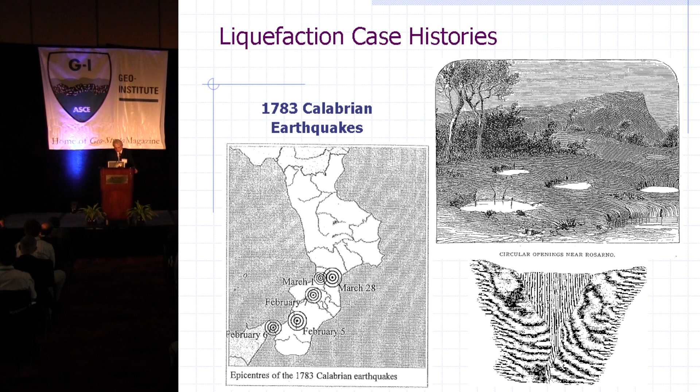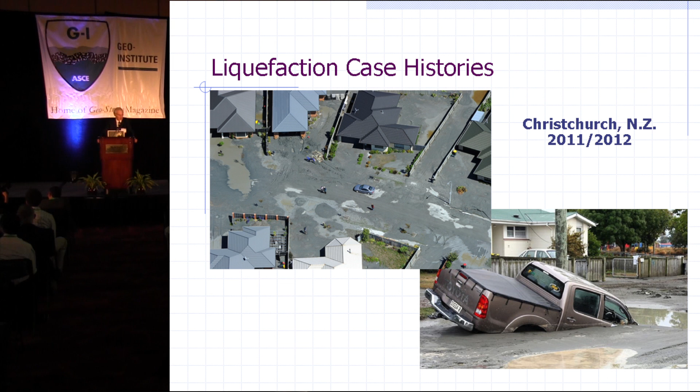Fast forward to 2011, 2012, the people of Christchurch in New Zealand also had 3 major earthquakes in sequence, ranging from magnitude about 6 to 6.3. Each time these earthquakes occurred, there was massive liquefaction in residential areas. You can see the sand boils in the streets, sand enveloping housing sites, and loss of bearing capacity for a pickup truck. Quite major devastation - in fact, 60,000 houses were damaged to one extent or another by this liquefaction phenomena in the Christchurch earthquakes.

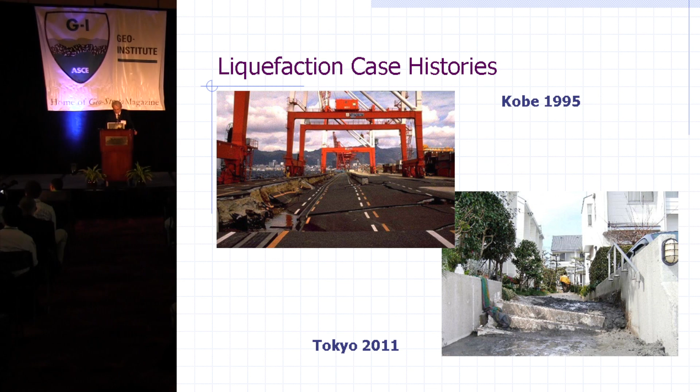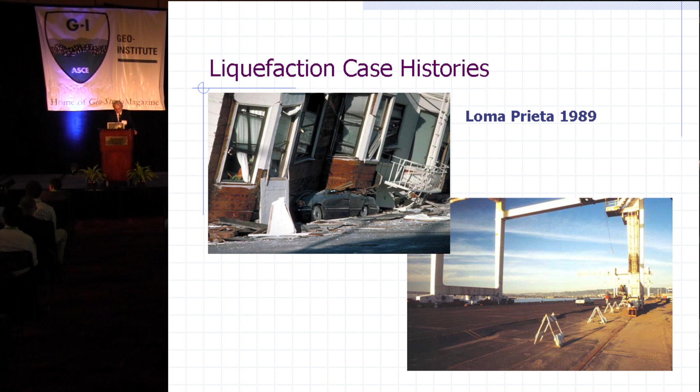Every earthquake has its problems. In Kobe in 1995, major lateral spread problems at the port. Tokyo 2011, known for the tsunami, had major liquefaction damage in Tokyo of a variety of forms. Here in Loma Prieta in 1989, bearing capacity problems. Again, more problems at the Port of Oakland arising from lateral spread.

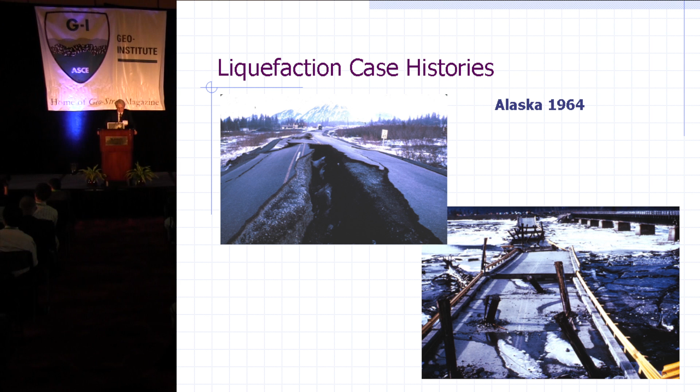Alaska 1964, one of the events that triggered interest in liquefaction here, caused major damage to highways from lateral spread problems and major damage to a variety of bridge structures. And Niigata 1964, just prior to the Alaskan earthquake, had major liquefaction problems, providing the classic photos now of bearing capacity problems with apartment houses and collapse of bridges.

So the problems of liquefaction are well known, and I've chosen to talk a little bit about some of my observations over the years on liquefaction problems, particularly the relationship between pore pressure buildup during the earthquake and volume change characteristics of sands under drained conditions.

So there are many damage modes, as you've seen from the slides: surface manifestation problems, slope instability problems, lateral spread, bearing capacity problems, liquefaction settlement after the earthquake. All of these problems have to be addressed by geotechnical engineers if they predict liquefaction might be triggered.

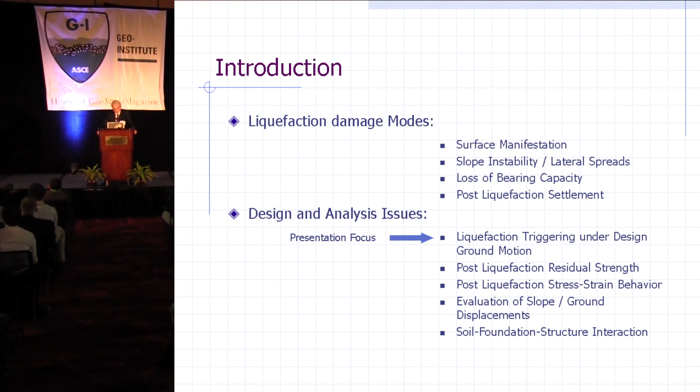So the issues in addressing these problems are numerous. One is the buildup of pore water pressure in the first instance leading to liquefaction. There's the post-liquefaction residual strength problem, which governs stability. Post-liquefaction stress-strain behavior is difficult to model following liquefaction. Slope and ground displacements are a challenge. Soil-structure interaction problems are a challenge. All of these problems are still getting extensive research, and improvements in our ability to analyze these issues are continuing.

So it's now almost 50 years since the Alaskan earthquake, and we're still working on these problems. But today I'd like to focus on the problem of pore pressure buildup.

So the scope of the presentation will focus on the mechanics of pore pressure buildup leading to liquefaction. I'm going to talk very briefly about the historical development of how we handle that, going back into the 1970s. So if you'll forgive me, I'm going to reminisce quite a lot about the 1970s, which was a very active period of research.

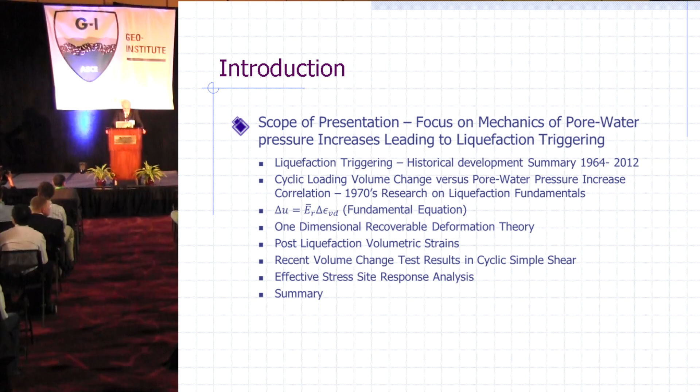That research was at UC Berkeley under Harry Seed's direction. We're going to talk about this fundamental equation, delta U equals E bar R delta epsilon VD, which we'll discuss. Then I'll comment on how the recoverable deformation theory, which plays an important role in pore pressure development, can be analyzed using simple particulate mechanics. A few comments on post-liquefaction volumetric strain, some recent test results on cyclic simple shear tests on dry sands, and finally a few comments on effective stress site response analysis.

Well, first of all, comments on historical development. The problem we have during an earthquake is one of cyclic shear stresses. If I can get the pointer... I've lost the pointer. There we go. Where the wave propagation causing site response generates a condition of cyclic simple shear near the ground surface.

And this is reproduced in a laboratory context as an equivalent number of cycles of loading. In 1964, when Harry Seed was faced with this problem, he was fortunate that he had a research program where he was looking at the resilient modulus of subgrade soils, and had developed a system of triaxial testing for repeated loads. So he could adapt the system with a research student named Ken Lee and start doing cyclic triaxial tests where we had cyclic deviator stresses being applied to the sample.

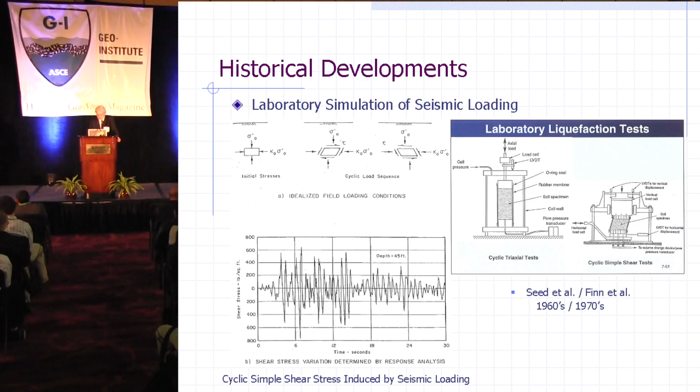These are typical lab test results that they got from such tests, where you see in terms of the cyclic triaxial test, the pore pressures gradually increased. I'm afraid the pointer is giving me all sorts of trouble. Here we go, okay. As you can see, during the loading sequence, the excess pore pressure builds up progressively to liquefaction. The cyclic component of the pore pressure is due to the cyclic all-round pressures generated by the deviator stress. What you will notice is that the cyclic strains generated during the simulations are very, very small.

In fact, by and large, they're of the order of 0.1, 0.2, 0.3%, which in a context you can understand is if you have a 1-inch high sample subjected to simple shear, the displacements are of the order of plus or minus a thousandth of an inch. So the liquefaction pore pressure buildup phenomenon is one of very small strains. In the case of the cyclic simple shear equipment, the results are similar. You see the pore water pressure building up very slowly, and again, the strains are very small.

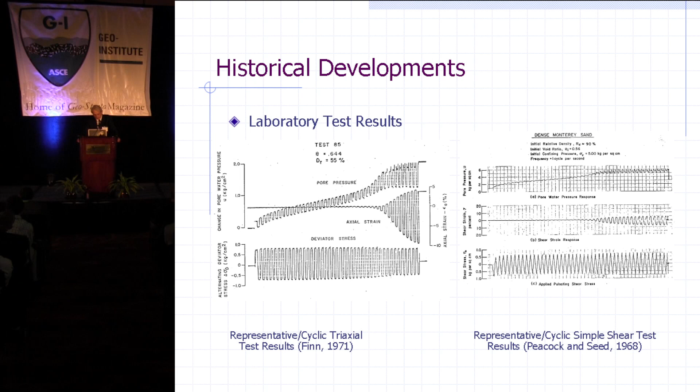What was found in these tests is that the cyclic simple shear process generated much faster rates of pore pressure development, such that the liquefaction strengths developing from the triaxial test needed factors of the order of 2/3 to be applied to get correct numbers. So the cyclic triaxial test method was gradually, I think, replaced by simple shear type loading equipment.

When they started continuing these tests through the early 70s, it was found that there were a number of issues in relation to using the test data for design. The test data, in terms of the strengths, was plotted as the cyclic stress amplitude applied to the sample divided by the normal effective stress, versus the number of cycles of loading, getting a so-called liquefaction strength curve. What was found is that the curves were a function of over-consolidation ratio.

If the samples, which should be normally consolidated, were over-consolidated, the strengths increased dramatically. The strengths also increased with relative density. Also, the test data was very sensitive to sample preparation methods, in other words, the fabric of the material. Trying to get field samples, undisturbed field samples, was very difficult with these types of materials, as I'm sure you're all aware. At the time, nuclear power plant siting was becoming a major issue.

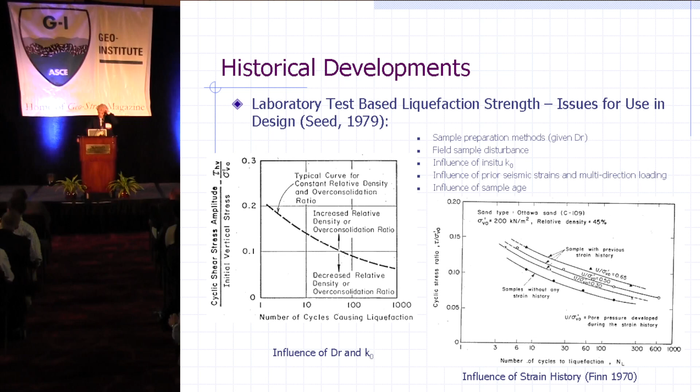For example, at the Arizona nuclear power plant siting problem, they had liquefaction problems, and people were trying to carve samples, block samples, to get best undisturbance. The Japanese were using freezing techniques to try and get very good samples. A number of issues about trying to get good material.

Influence of sample age was of concern. And also two-directional shaking. The shaking in the lab was just one directional. In the field, it's all over the place in three directions. So all these issues made it very difficult to try and establish the conditions for liquefaction in a design problem.

And so by the early 1970s, a different approach was being considered by Professor Seed and his colleagues. And that was to go into the field and look at field case histories where, based on the peak accelerations from the earthquake, which induced liquefaction or didn't induce liquefaction, they could calculate what the stress ratio demands were and then plot that against the standard penetration blow count.

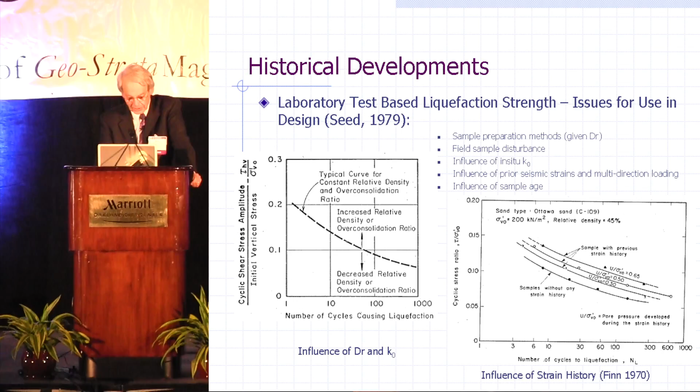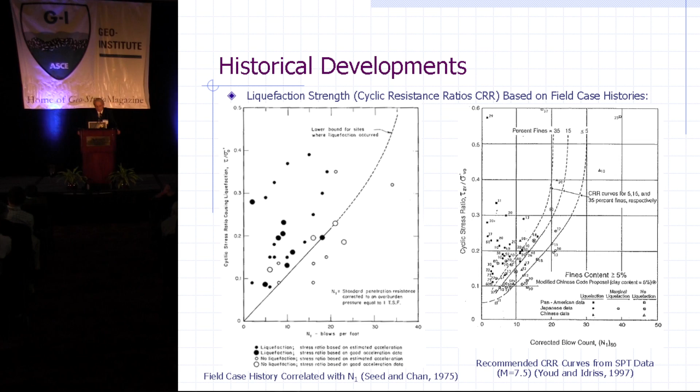The types of plots that are used today in these analyses are shown here on the right. Those of us working in the field use these types of plots to establish the liquefaction strengths dependent on the corrected blow counts, the percentage fines. These are the plots we use for magnitude 7.5 earthquakes. For other magnitudes, adjustments are made.

Similar plots are available for design based on CPT, tip resistance, or shear wave velocity to establish liquefaction strengths in the field.

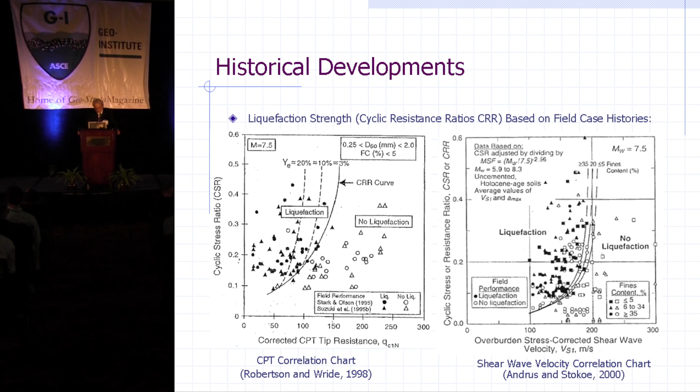So once those strengths have been established, then the procedure is something like this, and many of you have been through this procedure. You basically take the SPT data and plot it as a function of depth. You make adjustments for fines content. You then compare the liquefaction strengths with the cyclic shear stress demands from the earthquake.

If liquefaction is triggered, then one has to evaluate the consequences of that in terms of potential ground settlement, ground deformation, slope instability, etc. So that's the standard procedure, and there are still issues related to how that's being used, but nevertheless, that's where the process is at the present time.

So I want to now reminisce a little bit about the 1970s again, because we want to talk a little bit about the nature of the pore pressure buildup process and what are the parameters that are controlling the actual buildup of pore water pressure itself leading to liquefaction.

And at the time in the 70s and even today, the process is described as described by Seed and Idriss in 1971, which simply says if a saturated sand is subjected to ground vibrations, it tends to compact, decrease in volume. If drainage is unable to occur, the tendency to decrease in volume results in an increase in pore pressure. If the pore pressure builds up to the point at which it equals the effective overburden pressure, the effective stress becomes 0, the sand loses its strength completely and liquefaction occurs.

Of course, we now say the sand doesn't lose its strength completely, we talk about residual strength. But nevertheless, the thought is that there's a relationship between the way pore water pressure builds up and volume changes that occur under drained conditions.

As a professor at the University of Auckland, New Zealand, we had a great system. We were able to go away on a year's sabbatical leave every 5 years.

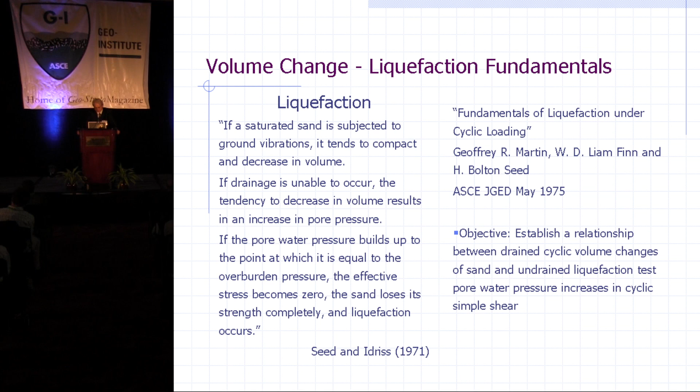So the question first is, how do we characterize volume changes in dry sands? At the time, in 1971, Professor Seed had a graduate student, Marshall Silver, doing work on cyclic simple shear tests on dry sands. The reason he was doing that was that in the San Fernando earthquake, there were major settlements of fills, which were basically compacted, slightly moist, sandy material.

So again, they went to work with the cyclic simple shear test. In this case, it was the NGI wire-bound membrane type of test, and it produced results like you see on the screen. You have cyclic shearing stresses being applied, and you're measuring the volumetric strains or change in height of the sample. The shearing strains being applied, simulating earthquake shearing strains, are very low, on the order of 0.3%.

So you could do tests on a variety of samples with different relative densities, and measure the accumulated volumetric strain after a given number of cycles, in this case 10, plotted against the cyclic shear strain amplitude. On the left, you see the resulting curve. The interesting thing about the results was that the volumetric strains were found to be proportional to the cyclic shear strain amplitude and totally independent of the confining pressure, as an experimental observation.

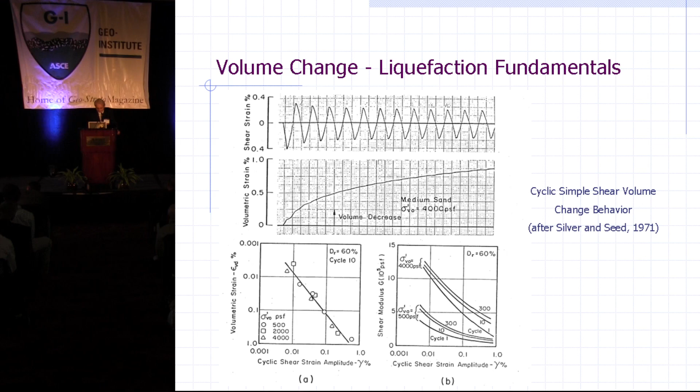So some additional tests were done to establish the database for subsequent research, where a particular sand called crystal silica sand, with a relative density of 45%, was used. You can see on the top curve that the volumetric strains are indeed proportional to the shear strain amplitude for a given number of cycles, which is a feature of the test results. The question is, can you develop a constitutive model which would allow you to establish volume changes under a random sequence of loading, as opposed to uniform cycles?

And the concept was to assume that the accumulated volume change during previous cycles was a memory function, and that for an increment of volume change under a future cycle of 0.1% shear strain, this particular curve would establish the incremental volume change.

So if you made that assumption, that the accumulated volume change was the memory function, then you could establish a series of curves which told you what the change in volumetric strain was for a given cyclic strain amplitude, as a function of the accumulated volumetric strain. A simple, two-parameter relationship could be established to give you the incremental volumetric strain under a given strain amplitude for these accumulated volume changes.

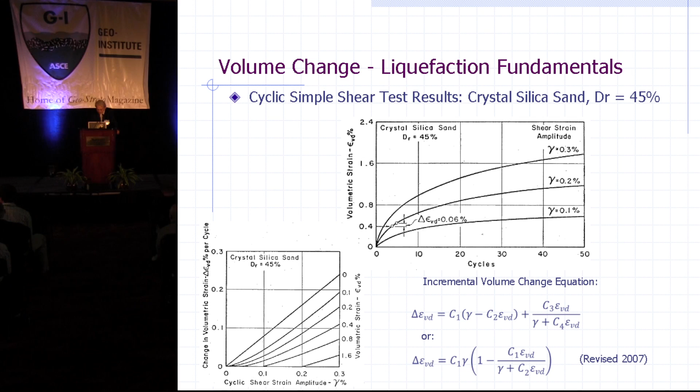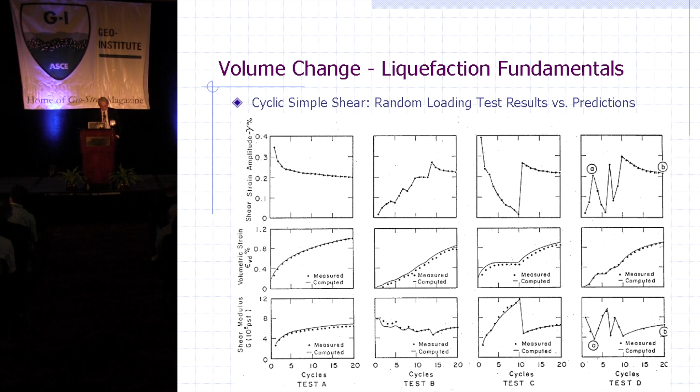That could be tested by doing a series of tests with random shear strain amplitudes, and you can see from these plots that quite a sequence of random shear strain amplitudes were applied to the samples, and the volumetric strains recorded. The dots are the measured values, and the lines are the computed values. So you can see the basic constitutive model now works extremely well, allowing you to compute volumetric strains under any sequence of strain loading.

Let's now look at the mechanics of one-dimensional loading of sands, because the recoverable strain in sands during pore pressure buildup plays a critical role in establishing the magnitude of that pore pressure buildup. So what happens when you actually load a sand in one dimension? On first loading, you have a nonlinear curve, and if you unload, you have an elastic rebound curve. So the loading of the sand generates a lot of irrecoverable strain, and you unload to have some recoverable strain.

It turns out that you can show that if you first load a sand in one-dimensional compression, the contact stresses on average at individual grains are actually at the cone of friction. So when you load a sand, you're actually getting sliding at grain contacts. It's like a limiting equilibrium condition.

You'll find that theoretically the horizontal stress versus the vertical stress is a constant. In other words, we're loading under constant K0 conditions, and K0 might be 0.4. If you unload down the unloading path, the particle contacts move within the cone of friction, and you start getting rotation of the contact stresses, and you actually start getting increases in K0 as you're unloading, until the contact stresses move right on the other side of the friction cone, and you get vertical slip.

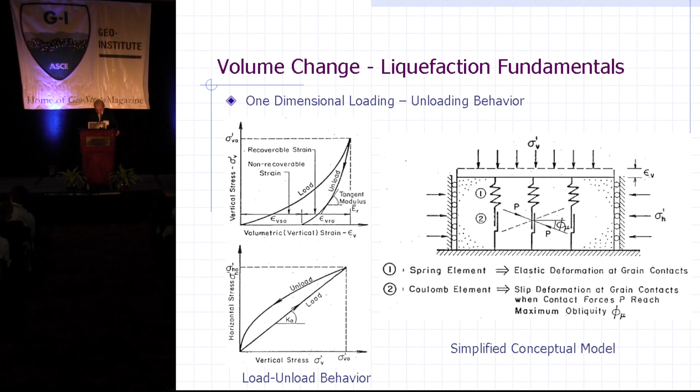Having established that concept, we're in a position to establish that relationship between volume reduction during drained tests and pore pressure increase in undrained tests. The concept is, even if you have a saturated undrained condition, you're still getting this slip at grain contacts similar to what you'd get in the drained test. So it still occurs. So if you look at the volume compatibility equation, you have to have the...

Change in volume of the voids, which is simply delta U times the void ratio, or the porosity divided by the compressibility of water, which is the change in volume of the voids under an increment delta U. And so that equals the change in volume of the structure, which is delta epsilon VD, the incremental change of volume, minus delta U over E bar R, which is the tangent modulus on the rebound curve.

And since Kw, the compressibility of water, is so high, essentially that equals 0 for a saturation ratio of 1. So therefore you have the very simple relationship that under an increment of shear strain, the pore pressure increment delta U must equal the rebound modulus E bar R times delta epsilon VD, the volume change that would occur in a drained sample under the same cyclic strain increment.

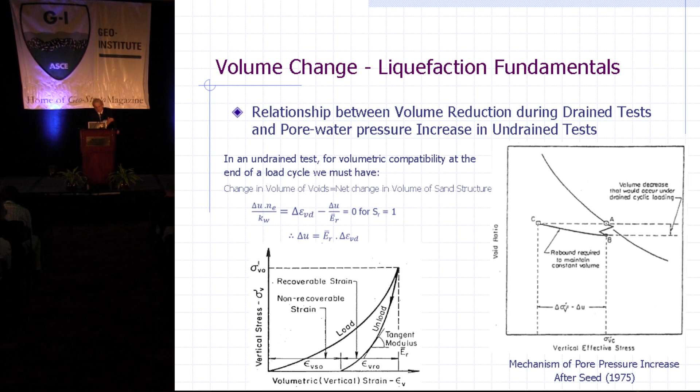So we coined that as a fundamental relationship governing pore pressure increases and their relation to volume change. We also mentioned that the shear stiffness increases with the volume changes, and we attributed that to the increase in K0 during the test. So we could establish a relationship between the cyclic shear stress versus cyclic shear strain, the nonlinear behavior, as a function of the volumetric strain. As the volumetric strain increased, the material in fact stiffened, and you could develop a relationship to describe that.

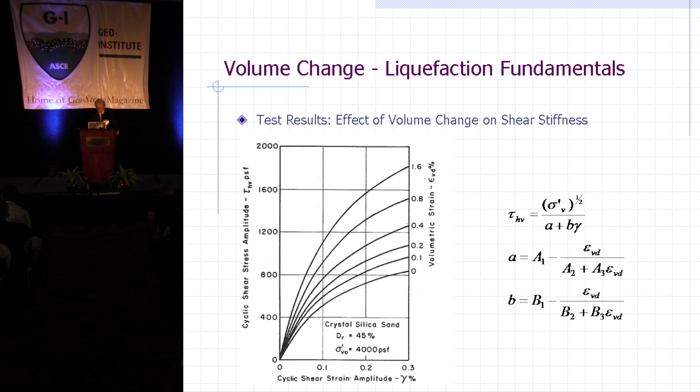So now you're in a position with these equations to look at the behavior of a simple shear test under stress-controlled conditions. You can simulate the rebound characteristics through a series of experimental curves — the ability to model a cyclic simple shear test under saturated undrained conditions and see what sort of results you get.

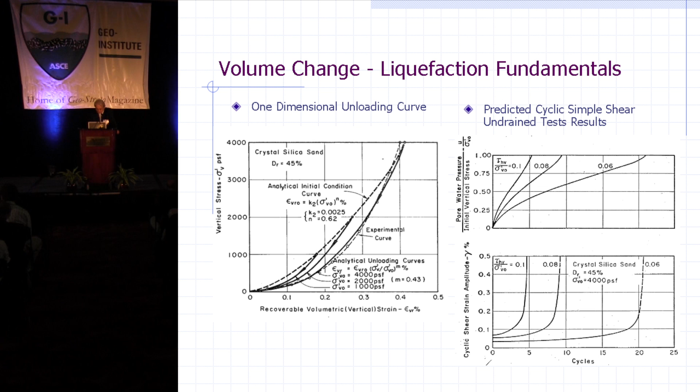The reason for that is something we hadn't addressed at the time: as the volume changes occur, the slip is going to occur during the undrained test, and you get the K0 value increasing. If K0 is increasing, that means you've got more recoverable strain accumulating as opposed to the recoverable strain for a test without the cyclic shearing. We'll talk about that shortly.

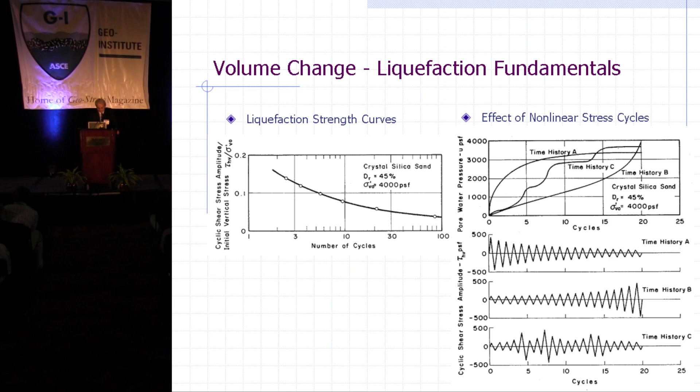So it was felt that this concept was reasonably robust based on the initial results, and this led us to think about system compliance and its effect on liquefaction tests.

The concern was that the system, which we assumed was at constant volume, could have a degree of compliance. For example, membrane penetration was becoming of concern to those in geotechnical engineering, where it was recognized that as you increase the pore pressure in a sample, the membrane, which is under confinement, would gradually expand. So it was nicely dimpled at the start of the test and nicely smooth at the end of the test. That was generating an artificial volume change in the sample.

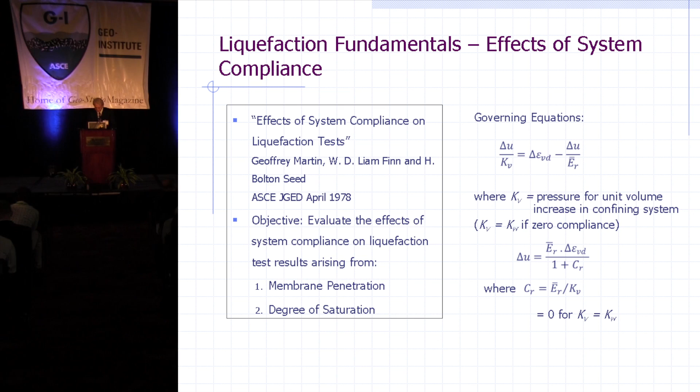So you could measure that artificial volume change in the sample, and you could end up with an expression based on a compliance ratio, where delta U equals E bar R delta epsilon V, 1 plus the compliance ratio, where the compliance ratio is the ratio of the modulus against the volume change characteristics of the system.

This had a big effect on the liquefaction strength curves. In fact, the liquefaction strengths almost doubled if the compliance ratio was about 1 — that is, the system compliance or volume change due to perhaps membrane expansion was about the same as the rebound modulus.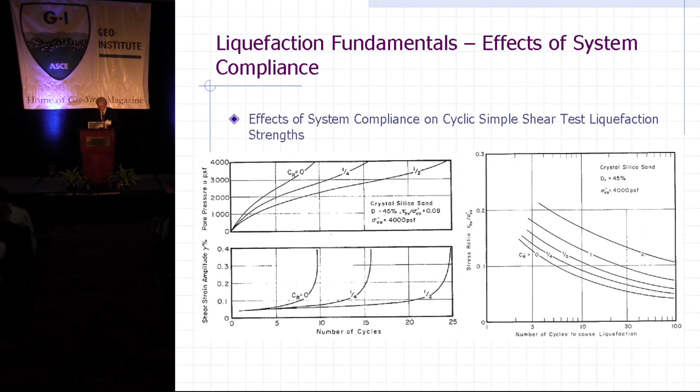This led us to look at some of the test results which had been published, particularly by Lee and Fitton in 1969. Ken had done a series of tests on 2.8-inch diameter samples with a variety of grain sizes, and he found that the liquefaction strength increased quite significantly as the grain size increased. So from 0.1 millimeters to 10 millimeters, you had about a 30 or 40% increase.

The problem is that as the mean grain diameter increases, the compliance ratio also increases. In fact, for a mean grain diameter of about 1 millimeter, the compliance ratio is about 1, which means the volume change you get in the sample from expanding the membrane is about the same as the volume change you get from elastic rebound.

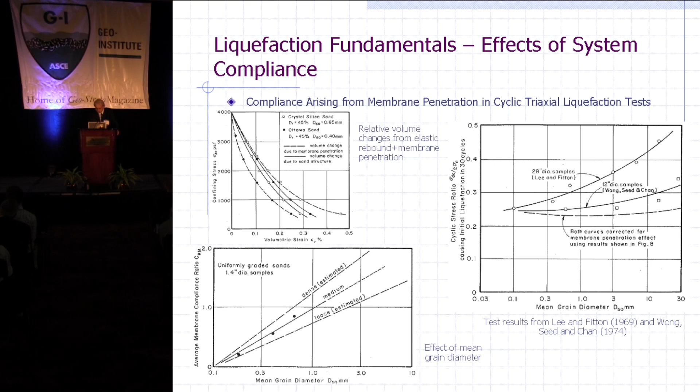Consequently, one could correct these curves to take that into account, and you'll find that in fact the liquefaction strength is totally independent of mean grain diameter.

The other concern was degree of saturation. You all know it's extremely difficult to saturate samples, and of course if you have some lesser degree of saturation than 1, the compressibility of water increases. There's a relationship published by Koning in 1963 which gives you the compressibility of water as a function of degree of saturation, so one could then establish what the effect of degree of saturation was on the liquefaction strength.

On the top left-hand corner, you see some curves where they all have the same number of cycles to cause liquefaction. But the bottom curve has a B value, or degree of saturation, of 0.98, requiring a 0.2 stress ratio to cause liquefaction, whereas the saturated sample only requires a stress ratio of 0.06. So clearly degree of saturation is a critical component of liquefaction strength.

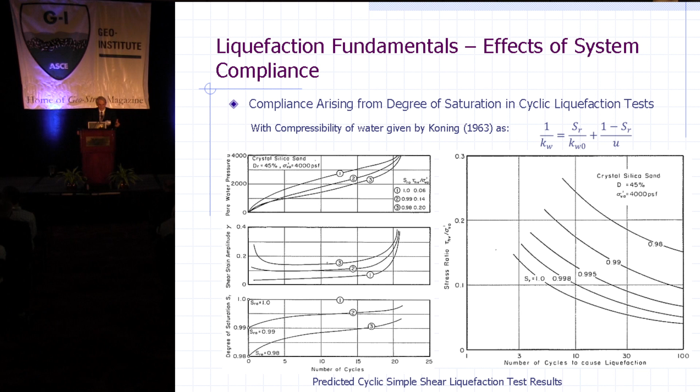A number of researchers in Japan and the US have researched this because it becomes a mitigation concept: if you can entrain air into the water, you can reduce the degree of saturation and have an impact on the liquefaction strength. You could measure that, as Ishihara has pointed out, by measuring the P-wave velocity, which immediately gives you some indication of the compressibility of water and can be related back to liquefaction strength reduction. Other researchers in the US are looking at using chemicals to induce air in the water to take advantage of this effect.

Another interesting thing going on at Berkeley in the 70s was the thought that with these little simple shear tests, the stress distribution may not be very uniform — you have difficulty mobilizing the complementary shear stresses on the sides of the sample. So the thought occurred: let's do some shake table tests on these sands.

We have a shake table, and what we're going to do is put a layer of sand on the shake table about 4 feet long and about 3 inches high, so the height to width ratio is very low. This should give us a fairly uniform shear stress distribution. We're going to induce the shear stresses by putting a steel cap on top, which will generate inertial forces and hence cyclic shear stresses. So tests were done, and pore pressure versus number of cycles to liquefaction curves were established.

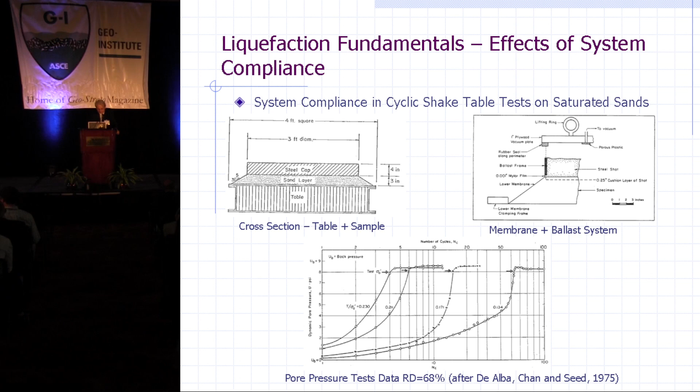But it was recognized when looking at the equipment, there was a problem. They had a ballast layer here, which was steel shot. They had a membrane. These samples were saturated by back pressure saturation, but this membrane came across, and so again you had the possibility of system compliance. As the pore water pressure built up, the system volume would change. Consequently, this fundamental equation was applied to provide correction factors to that experimental data.

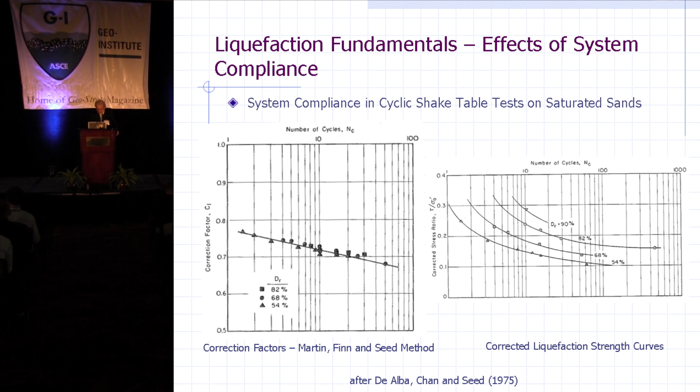You can see here that the correction factors could range from 0.1, 0.8 to 0.7, depending on the number of cycles. So these correction factors were then applied to the experimental data, leading to these curves which are widely published by Seed and De Alba, showing the effect of relative density on liquefaction strengths.

Another interesting problem experimentally is the data coming out of the lab, of course, was just one directional. And so the question arose, well, what effect does the two-directional shaking have on liquefaction strengths and indeed volume changes? It turns out that at that time, with this same equipment I've just described, Professor Seed had a student, Bob Pyke, who was given the task of looking at the behavior of dry sands under two-dimensional simple shear stress conditions using this equipment.

The bottom line was that he found that, to do this, he put a sample on a shake table, just like I've described, shaking it in one direction. Then he put the shake table on another shake table so we could shake in two directions simultaneously. What he found was that the volume changes that he got with two-directional shaking were about twice those of just the one-directional shaking. So consequently, those of you who are familiar with the Tokimatsu and Seed procedure for calculating settlement, there's a factor of 2 you use in those calculations.

Here's the rebound characteristic prior to loading. We reload and we do the cyclic simple shear test and measure the vertical strain or the volume change during the test. Once we finish the test, we unload again. And you'll notice that the unloading or rebound curve is significantly different from the original curve.

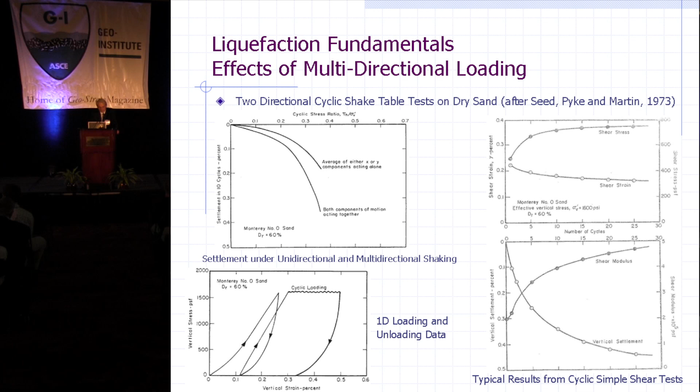So armed with all this data, you could then predict what the effect would be on liquefaction behavior with the doubling up of the volume changes, given the fact that you have now the unloading characteristics. You have the shear modulus parameters, you have the volume change parameters, so you can go ahead and apply the delta U equals E bar theory, and then compute the pore pressure increases.

So again, you'll find that these are the results of that theoretical analysis, and you'll see these are the pore pressure versus number of cycles curves, one directional shaking, two directional shaking, then the resulting liquefaction strength curve. So you see that with the two directional shaking, you have a reduction in the liquefaction strength of about 20-odd%.

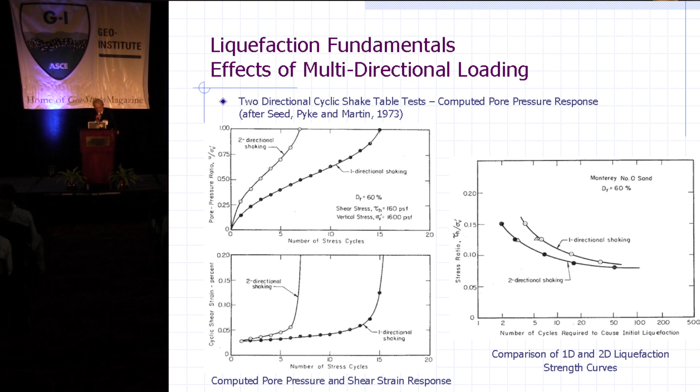So this is yet another factor which had to be applied if you wanted to use lab testing for liquefaction strength evaluation. So you can see it's very difficult to do these lab tests.

At the time, since we're talking about cyclic shear strains as being the controlling parameter as opposed to cyclic shear stresses, the concept arose, well, let's continue doing strain-controlled cyclic simple shear tests when we do further research. At the time, Professor Finn, who was involved in this, had a student called Shoba Bhatia, who utilized the cyclic simple shear equipment which they had at the University of British Columbia.

This was an interesting device which had rotating side plates using a mechanism that was established actually by Roscoe at Cambridge. And the concept was, well, let's forget about saturating these samples. Let's just do constant height tests.

So what you did with the concept of constant height, well, you have this frame, and you can apply your initial vertical effective stress with the bolt system you see at the top. And then you maintain that sample then at constant height and can start the test.

And of course, you're going to get volume change in the sample, which will reduce the vertical stress that you're measuring. And the concept was that reduction in vertical stress would be the same as the increase in pore water pressure had you done a test, a normal saturated test in simple shear. And this was confirmed by a series of tests that this, in fact, technique of constant height sample testing with monitoring of vertical stress was an effective way of doing liquefaction tests.

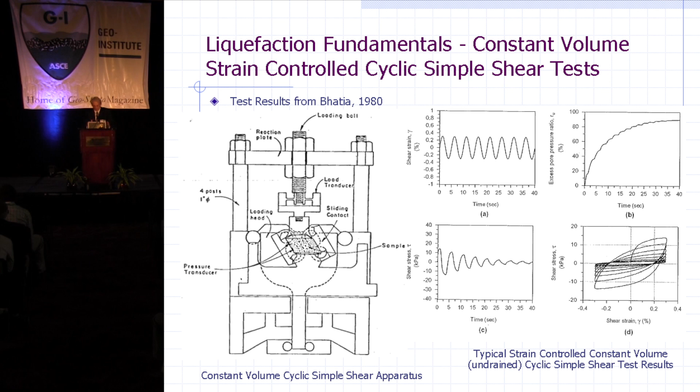You can see there's a unique relationship between volumetric strain and pore pressure increase, confirming the concept that volumetric strain is a key component of pore pressure increases.

Professor Dobry also was doing research on strain control and strain relationships with pore pressure development in the late 70s and 80s, and developed his own strain-dependent relationship with pore pressure increases.

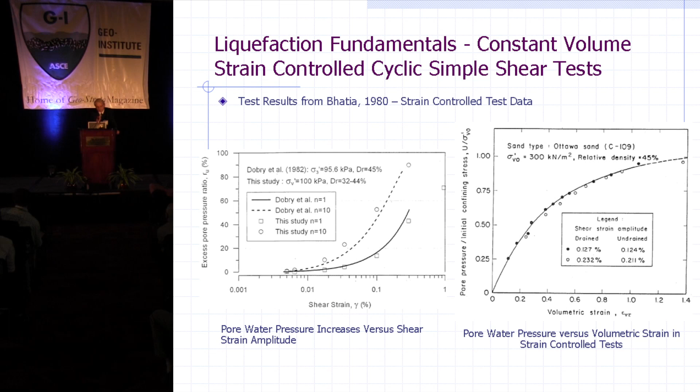The interesting thing about this type of plot, which we must recognize, is that once you get down to strains of the order of 0.01%, essentially you don't get any permanent volume changes in cyclic simple shear, or for that matter, pore pressure increases. So there's a transition strain of about 0.01 to 0.02%, where we don't have to worry about pore pressure increases during testing.

Bhatia was able to look at a whole variety of conditions comparing undrained behavior with the drained behavior using the volume change relationships we've been describing, and in fact validated both pre-straining effects. This slide isn't a good one, so I won't attempt to describe it, but the right-hand slide shows theory and prediction for a random sequence of stress cycles.

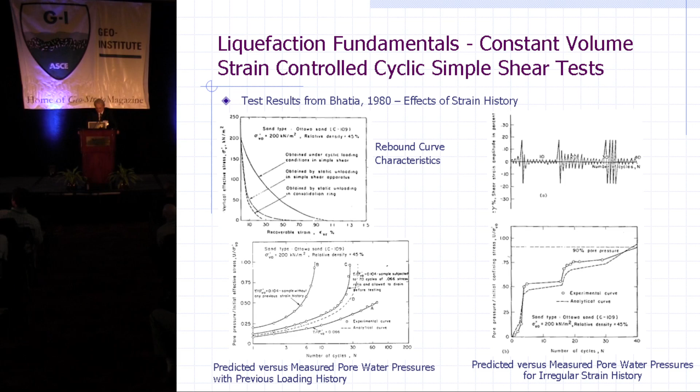Also at the same time, Bhatia did a range of tests, again looking at overconsolidation ratio and its effect on liquefaction resistance, and the ability of the fundamental model to predict the effects of overconsolidation ratio somewhat successfully.

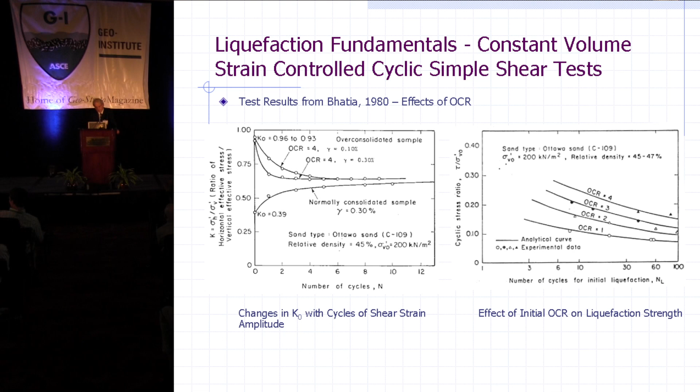Interestingly enough, looking at the left-hand figure, as I said, she could measure lateral stresses. For a normally consolidated sample, starting off with K0 of 0.39, as you can see, during the increase in number of cycles, you're gradually increasing K0. If you start off with an overconsolidation ratio with K0 values around 1 for an overconsolidation ratio of 4, you'll find during the tests the actual K0 values actually reduce down to similar values as the normally consolidated sample. So this interplay between volume change and overconsolidation ratio becomes an important factor. Of course, as the overconsolidation ratio increases, your volume change reduces, and of course your liquefaction strength increases.

I want to comment just briefly now on particulate mechanics. People have researched particulate mechanics looking at the ability to simulate liquefaction problems. It's a very complex problem, but you can take a very simple viewpoint on it.

Since recoverable strain is an important component of liquefaction behavior, it's worthwhile trying to see if a very simple particulate mechanics model can tell us something about recoverable strains. You can take a sample in 1D compression and start looking at the load and unload behavior. The first component of the problem is, if you're simulating it with spherical spheres with some elastic property, you can look at the elastic deformation of just one sand particle against another, assuming they're uniform elastic spheres. The first component of that problem is it's all recoverable elastic deformation.

So you find that in the vertical direction, the recoverable elastic strain, the incremental strain, is the same as the vertical strain.

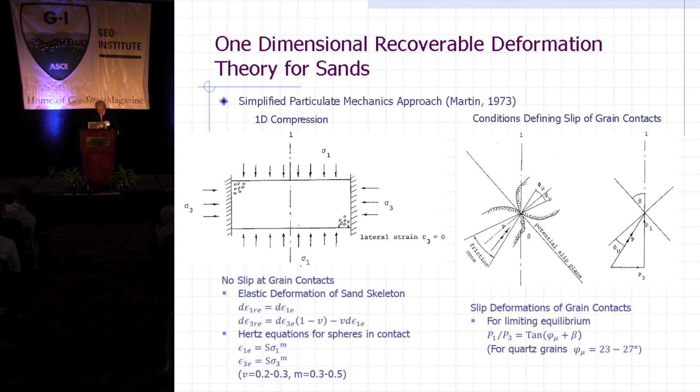Then you have the slip condition, where at first loading the contact stresses will be on the cone of friction. For limiting equilibrium, you have two components in the 1 and 3 direction equal to tan phi sub mu plus beta. For quartz grains, phi sub mu is about 23 to 27 degrees.

If we look at the slip deformation of grain contacts, you can have two systems. One is a stable system on the left, where when grain slip occurs, the grain is slipping in a stable configuration between other grains, and consequently the lateral elastic deformations accompany the vertical deformations to maintain zero lateral displacement.

So you're getting this additional recoverable strain developed along with an increase in K0. In an unstable system on the right, you get particles slipping into a void, and we're not interested in non-recoverable deformations, so we'll forget about that. The resultant recoverable strain then is equal to the recoverable strain from elastic contacts plus the recoverable slip strain.

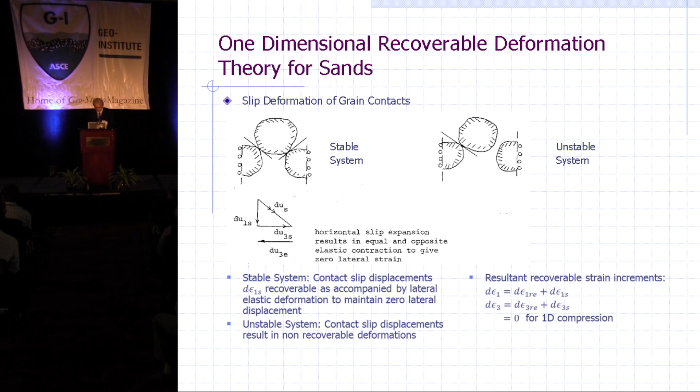Interestingly enough, you can do some tests in the laboratory loading and unloading sands in 1D compression. What you find is that as you start doing this, you get some non-recoverable strain, but the more cycles you do, the more unstable contacts are eliminated, and you end up finally, maybe after 100 cycles, with a closed loop system unloading and loading elastically.

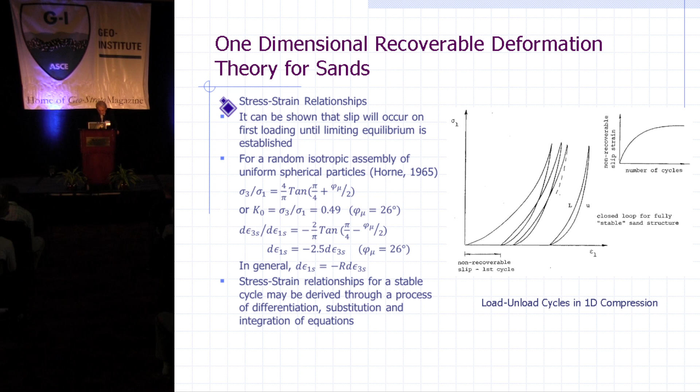As I said before, if you take a random isotropic assembly of spherical particles, Horne in 1965 generated the rationale for slip at grain contacts at first loading. In general, he came up with the expression that the incremental slip deformation was equal to minus R times delta epsilon 3, where R is a function of the structure of the sand.

If you do a lot of substitution and integration, and we've already talked about too much mathematics, you end up with equations describing the loading and unloading cycles in one dimension. These equations generate data that you see here, where you see vertical stress against vertical strain, load and unload. Loading, you have slip at grain contacts, giving you the K0 value, which is a constant.

Then when you unload, you go through a set where the contact stresses are within the cone of friction, but finally you get slip in the reverse direction, and the unload curve in terms of sigma 3 comes along here, and then eventually you get slip and a drop down here.

So that can be compared with experimental data after Hendren. Hendren did a bunch of work looking at 1D compression, and indeed the unloading curves and lateral stress curves agree quite well with this simple theory.

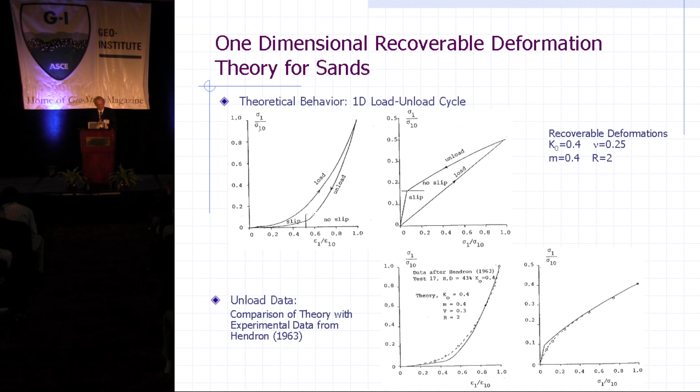So then you can go on and say, well, what happens to the rebound curve if you induce some cyclic simple shear displacements, increasing K0. Indeed you can generate theoretically this increase in elastic rebound, where this is the normal unload curve. You develop the additional volume change from cyclic simple shear to a K0 of 1, then unload, and you can see you've got a significant increase in recoverable strain.

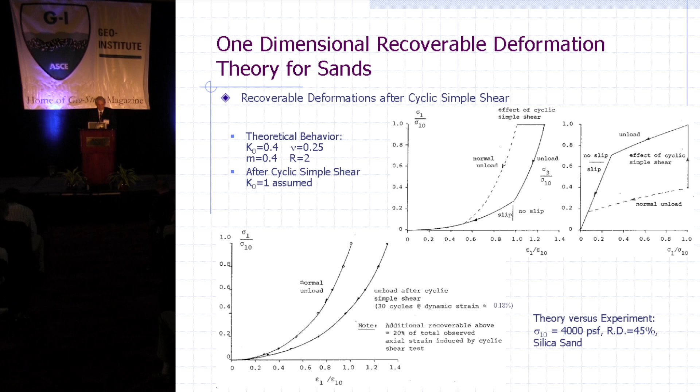Here's some experimental curves which by and large agree quite well with the theory. So you have this additional complication in developing the constitutive model of a recoverable strain which is varying as a function of the volumetric strain.

Basically the fundamental theory we've talked about, I think, is a robust model. There are complexities with it, but nevertheless in terms of explaining the incremental pore pressure buildup that occurs and its relation to volume changes, I think it's been quite successful.

Once we get liquefaction, of course, we get much larger cyclic shear strains, and consequently one can imagine then that the sand structure, once you get this cyclic mobility developed, or ground lurch as we call it sometimes during earthquakes, the sand structure will be totally remolded and take on a different configuration. Whereas when we're building up the pore water pressure at low strains, remember these are the order of 0.1, 0.2, 0.3 percent, it can be envisaged that the sand particles themselves are essentially positioned in the same structure.

So if we look at the curves published by Tokimatsu and Seed, we find in terms of the volume changes that are occurring post-liquefaction, that the values prior to liquefaction are of the order of the same elastic rebound strains we get from the test data.

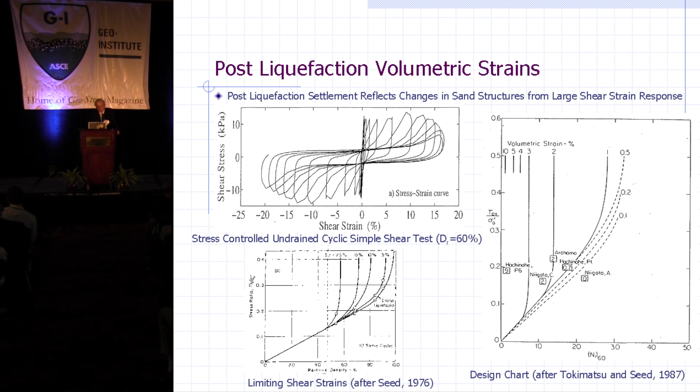So I'm looking at the wrong curve, sorry. Here's the volumetric strains - these are the cyclic mobility curves. Prior to liquefaction, we're getting 0.1, 0.2, 0.5%. Once we get liquefaction in this range, the volumetric strains are 2, 3, 4, 5%, which are typically the values you'd get for first loading a sand, a virgin sand.

Now, we've talked about volume changes, and in these early test sequences, people were testing this crystal silica sand, and they were testing Ottawa sand - the two main sands being tested. So the question you might ask is, do the volume changes during cyclic simple shear vary from sand to sand?

Both test programs at USC and UCLA under Jonathan Stewart in recent years have been looking at volume changes under a variety of different sands. Here you see some data published by Jamal Ramadan, a USC graduate student, where he looked at a wide range of sands. This just shows some of them - there are many more. You can see the grading is ranging from fairly uniform to well graded.

If you look at the volume changes, and these were tests done at 0.1% strain amplitude, you can see that they vary enormously. Crystal silica sand is somewhere in the middle here. So if you take the test data from crystal silica sand, depending on what type of sand you have, it can vary enormously.

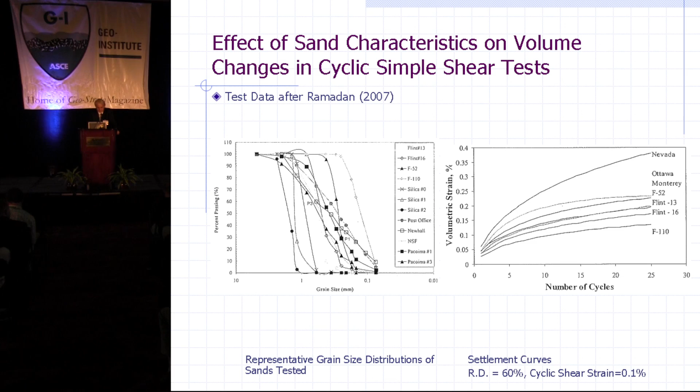And having looked at - these are all quartz sands incidentally - you find that the interesting correlation is that the volumetric change for a given relative density is in fact proportional to E minus E min, that is the void ratio minus the minimum void ratio. For a given relative density, of course, E min will vary and E max will vary from sand to sand. But for a given relative density, the E values will be different.

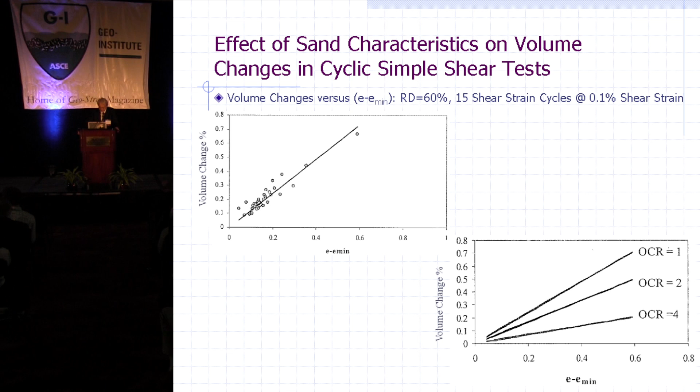So if you plot E minus E min, at least for volume changes occurring under strains less than, say, 0.5%, there seems to be a good correlation. In other words, the closer the void ratio is to the minimum void ratio, the volume change is less. Likewise, if you test these samples at different overconsolidation ratios, you'll find the same relationship seems to apply, and the volume changes are substantially less with overconsolidation ratio.

So this raises the question: wouldn't you expect a big change in liquefaction resistance from sand to sand at a given relative density, since these volume changes are changing quite a lot? So here are four sands: Nevada, silica number 20 which is crystal silica, Monterey, and F-110.

Rebound curves, just straight rebound curves, were established for all these sands. What you notice is that for these sands that give the greatest volume changes, they have a totally different recoverable strain energy - in other words it's much more, whereas for the sand here, the recoverable strain energy is much less. So there's a compensating effect here, because whereas the volume changes for Nevada sand are much greater, the rebound characteristics are much less. That means there's a compensation in terms of the pore pressure increase.

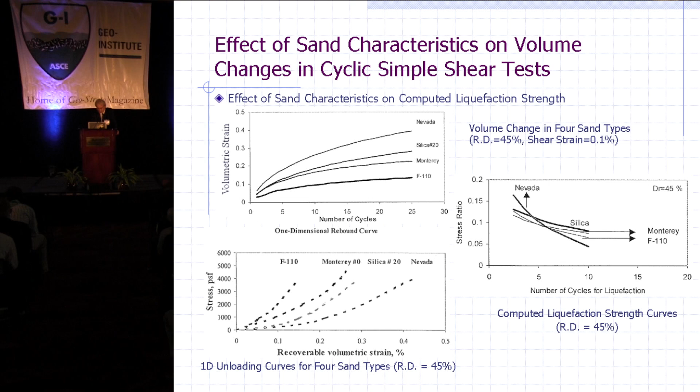So if you apply the fundamental theory to establish the liquefaction strength curves, you'll find that the differences are not that great, although there are differences. So it would seem to suggest that we don't have to worry too much about the variation in liquefaction resistance with the type of sand.

On the other hand, you have to worry about Tokimatsu and Seed, and those of you working in the field use this plot all the time to assess the volume changes occurring in sands under earthquake loading - in other words, the settlements. These are a unique set of curves, and just like liquefaction curves, are a function of blow count. So you could say, well, isn't that the same as for liquefaction curves?

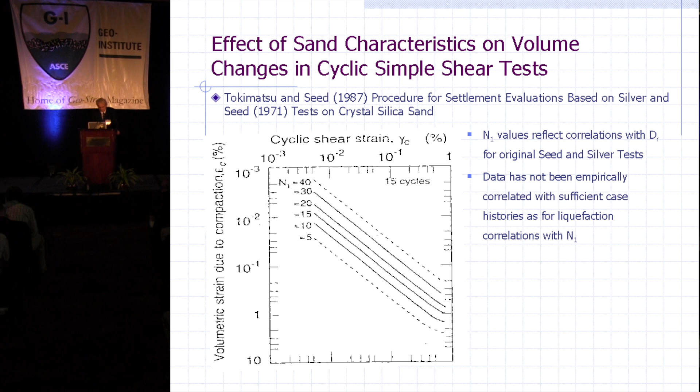The blow count reflects all these things, the K0, the pre-straining, etc., but in fact these blow count curves were established by straight relative density correlations from the original data set used to develop these curves. The original data set was the volume changes for crystal silica sand established by Silver and Seed back in the early 70s. So this settlement data hasn't been correlated with sufficient case histories as for liquefaction correlations with respect to blow counts.

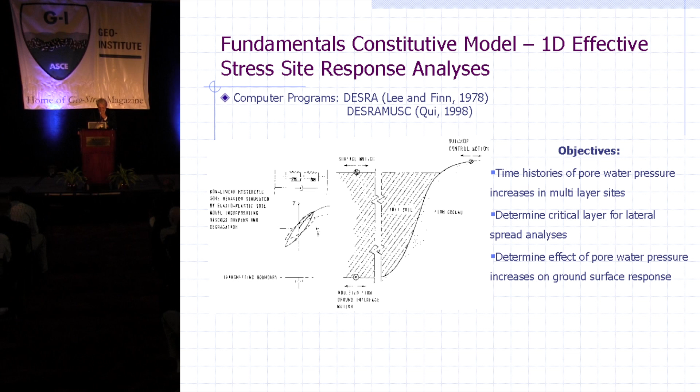Well, you could argue, now we've got a constitutive model for pore pressure increase. Can we put this into a site response analysis to do an effective stress site response analysis? Because we'd like to know how the pore pressures build up as a function of time using a constitutive model such as the one we've described. This was done in the late 70s by Lee and Finn to develop the program DESRA, and more recently at USC they modified the program.

But obviously the establishment of the parameters for these tests becomes a challenge in a practical sense, because we're not going to take samples in the lab and do a bunch of tests to establish rebound characteristics and volume change characteristics. So we have to go through some pragmatic approaches to establish the basis for doing one of these analyses.

And first of all, we need to establish a nonlinear backbone curve. So what we do is take the conventional modulus reduction curves as a function of strain and convert that into a nonlinear backbone curve.

Originally it was assumed hyperbolic. Now we have a different Masing model. We do suppress the strain hardening. In other words, we don't complicate life by recognizing that the modulus will increase with volume change. We suppress that. We've also got to degrade the backbone curve as a function of pore pressure increase, and we use a degradation parameter approach established by Vucetic at UCLA.

Then you've got to get some representative elastic rebound curves. You've seen how difficult it is to establish those rebound curves. So we use a pragmatic approach and establish some curves just based on N1 values as best we can.

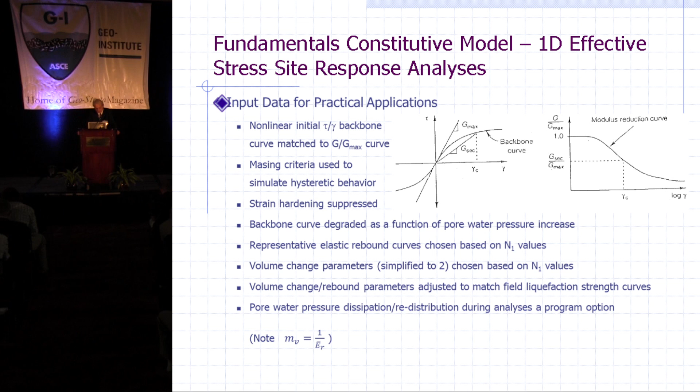However, from my perspective, I think in the calibration process of some of these models, they should look closely at the pore pressure buildup phenomenon. In other words, a constitutive model should be able to function in the drained domain and predict volume changes under drained tests if it's going to be a robust type model for analysis. It also should be able to reflect changes in K0, because I think the pore pressure changes in a K0 situation, if it's over-consolidated, will be somewhat different from a normally consolidated material.

So why do we want to do these effective stress analyses? They can become quite important. They're obviously not done on a routine basis right now. They're complex. But here's a simple example which illustrates some of the issues.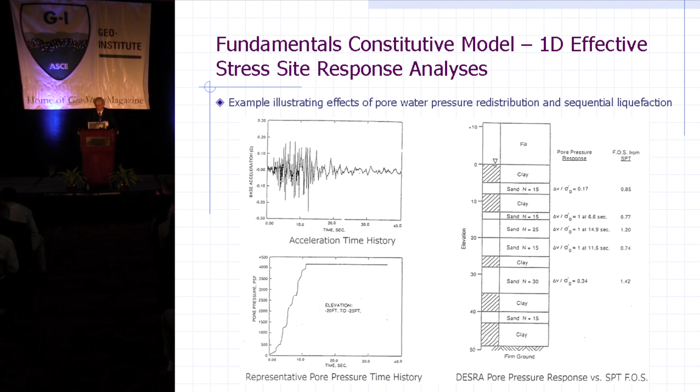So there are important aspects of these types of analyses which can have a particular impact on our understanding of a liquefaction problem. Here's another example illustrating the effects of liquefaction.

In this case, it's a multiple layer system. And I think what we all recognize is we don't have nice, simple systems in the field. We have multiple layers. If you do a CPT, you'll find that factors of safety are varying enormously from layer to layer. It's difficult to figure out what's going to go on.

But the interesting thing is that once a layer appears to liquefy, the energy seems to be focused on that particular layer. And although the layers above that layer did gradually build up pore pressure, even though the base isolation system on this layer reduced the stresses getting up there, the large strain potential was focused on that first layer that liquefied, which I think is another issue, because I think you always want to know where the seat of a lateral spread is going to be.

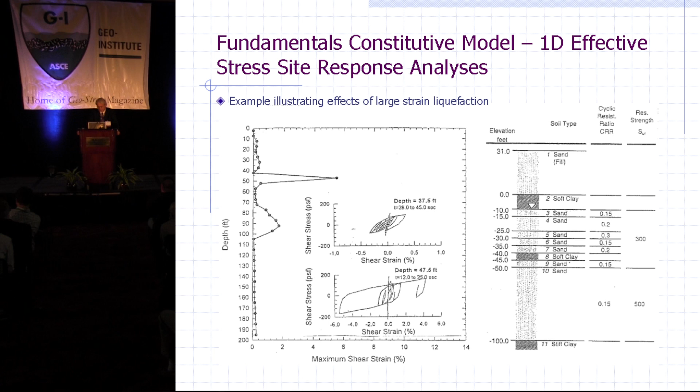So there's a lot of work to be done on these effective stress analyses, and they're complicated, but nevertheless I think they should be getting a lot more attention than they are right now.

So just to summarize, I think I've tried to illustrate that the two key factors influencing the progressive buildup of pore pressure: the mechanism simply involves the incremental strain-dependent volume change and the associated incremental recoverable volume change to maintain constant volume under undrained conditions.

I think that's a very robust model. The complexity is, of course, in the recoverable strain, which in turn is a function of the buildup of pore pressure and the changes in K0 conditions.

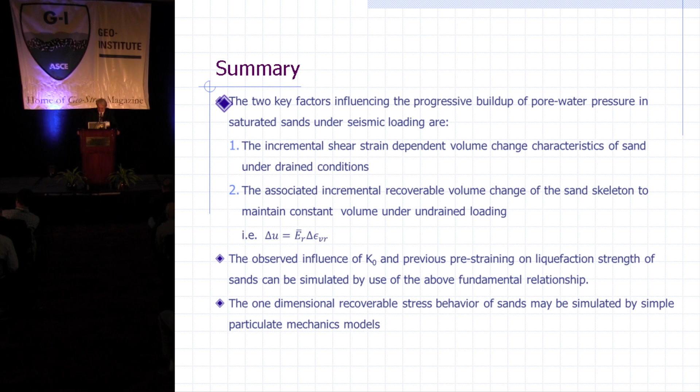The observed influence of K0 and previous pre-straining on liquefaction strength of sands can be simulated by the use of this fundamental relationship. And indeed, the one-dimensional recoverable strain behavior of sand can be simulated by a simple particulate mechanics model. So what do we need to do?

I think, although the pore pressure buildup problem is not getting a lot of attention as opposed to the liquefaction triggering mechanism and liquefaction strengths, we need to understand a little bit better how that pore pressure does build up, and it's a function of a number of variables.

So I think we need to do a little bit more research characterizing these parameters that seem to represent the build-up mechanism.

Also, I think we need to do further research to establish the practical use of the constitutive model in non-linear effective stress site response analyses, not only the model I've described, but other models that are starting to be looked at closely. And I think any model that could be used with confidence needs to both simulate undrained behavior and drained behavior.

For multi-layer sites with varying liquefaction strengths, effective stress analyses provide key information on the initiation and location of post-liquefaction deformations, and in fact the whole pore pressure build-up process as a whole.

And I think what I'd like to do is encourage people that are working with centrifuge systems to look more closely at doing tests on multi-layer sites with different liquefaction characteristics. Right now it seems to me there's a tendency just to use two-layer systems, rather simplified systems.

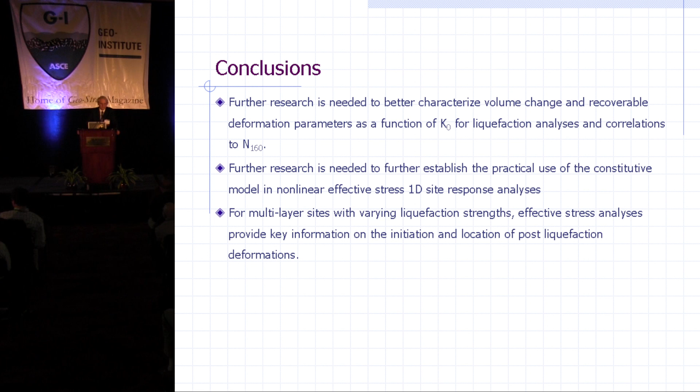I know it's more difficult to prepare samples, but I think the use of a centrifuge with multi-layer systems with different factors of safety against liquefaction would throw more light on the importance of doing these effective stress types of projects. So I think that concludes my presentation.